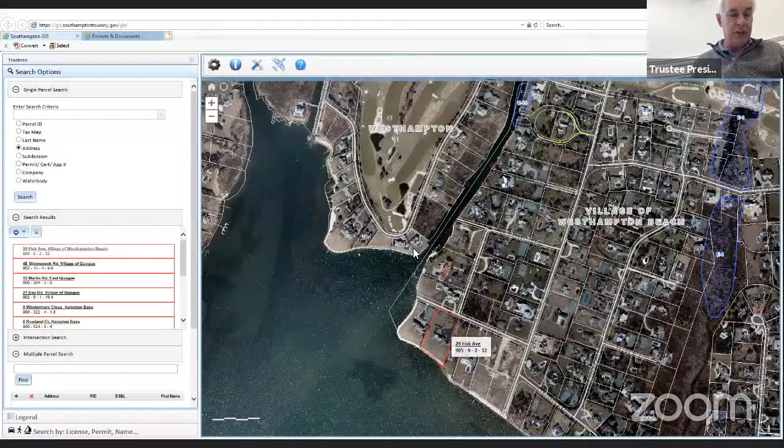All right, so we move on to general permit applications for determination. First one on the agenda is John Keough, 29 Fisk Avenue, Village of Westhampton Beach. And it is for a dock that is 125 feet in length. This has been discussed before a little bit.

If you want to bring up the bathymetric detail on that. Okay, is the applicant's consultant here? Yes. Okay, want to let them in? Okay.

Afternoon, everyone. Hello, Lisa. Lisa Poyer with Inter-Science on behalf of the applicant. Okay, so at...

At 125 feet, they reach a depth of 1.9 to 2 feet of water at 125 feet. At this point in Moriches Bay, the pier line is 100 foot. Okay, so a permit, the only other permit in the area, was issued...

to an entity called Onek Tove, which is at the end of Onek Lane. That was in 2003. It's an 84-foot long catwalk, and that reached 2.4 feet of water.

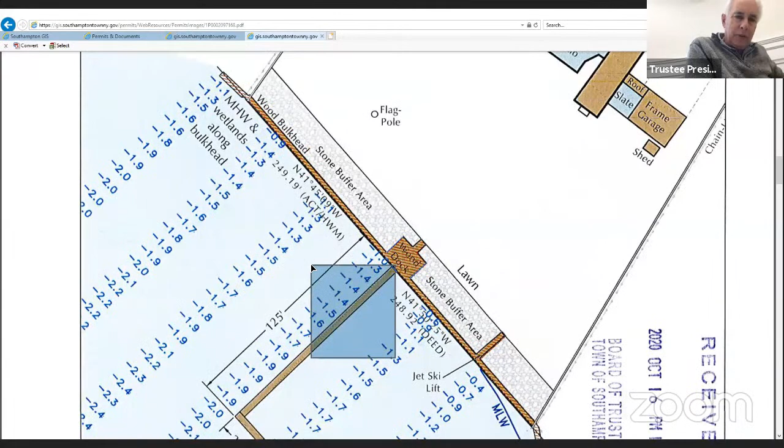I'd be hesitant to allow for anything longer than what exists at the property to the west. But that was originally a large house, and we allowed that dock. Now the house has been demolished and it's been split up into 4 different lots.

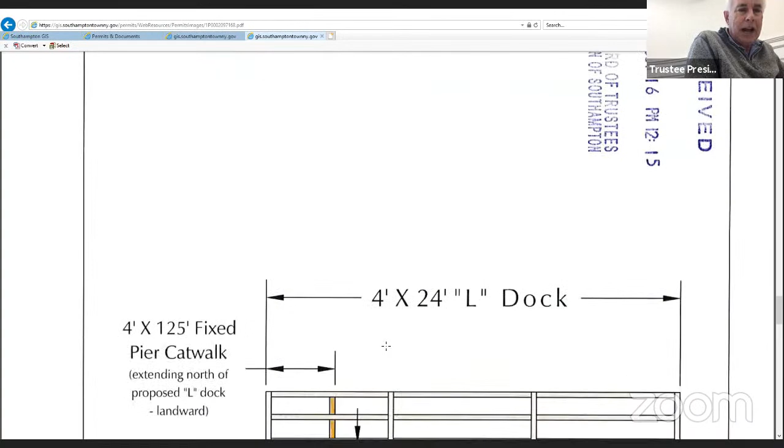So I anticipate another dock probably coming in between that and the easterly dock. So we have to account for that. It's roughly the same dimensions of water. I'd like to try to keep it in that line at least.

So my main question is, could we propose a boat lift for the owners interested in doing 2 jet skis on the property? They have the jet ski type lifts that lift the ski entirely out of the water, and they're fixed only to the dock. Is that something we could propose and you would entertain?

Oh, to fix that to the dock instead of the bulkhead? I wouldn't have a problem with that because we do allow for boat lifts in Moriches Bay.

Okay, so let me come back with the revised plan. I may try and shift it. Well, let's get the opinions of the rest of the board. How is everybody on that?

That's fine. I didn't realize it was going to be used for jet skis because I was just concerned about the depth of the water if there was a boat lift. But if it's for jet skis, that's fine.

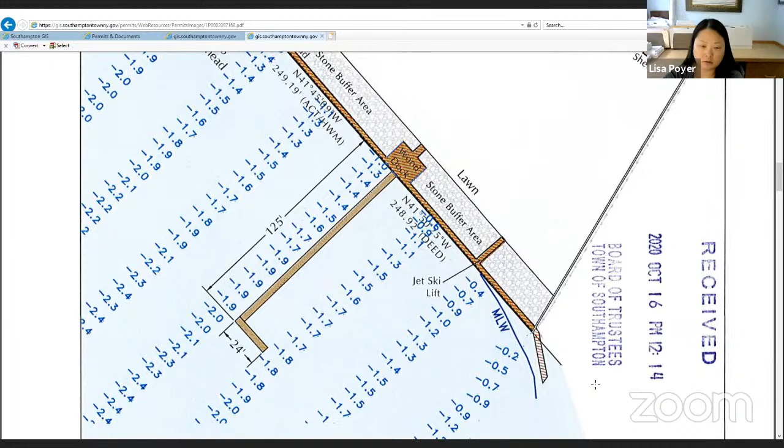Okay, what kind of lift are you gonna have? Are you gonna swing it onto the dock or will it be just hanging in midair? I think we're trying to look at, I don't know if I can share my screen. Well, those elevator docks, those angled ones that just kind of drop into the water. Right, because we don't want to put an eyesore out there for the neighbors either.

Okay, so let me put together a revised set of materials and resubmit it back to the board. Do you want to share your screen? I was trying, Lisa. Because I think, Charles, oh, there it goes.

Because you have a picture of the jet ski float, the lift. This is an example I just found online, but it's this style. Yes, that one.

And then there's, they would take much less of a beating out there. Actually, you could bring them in a little bit closer also. But it goes into the water just enough to lower the jet ski down, but it doesn't physically touch the bottom, but it does allow 2 jet skis to be used. Raised and lowered, and it is affixed to the dock.

Here's the question. How much water does it need? I don't know, I'd have to find out what the jet skis draw.

The question I have is that if it's only going to be used for jet skis, does he really even need 80 something feet? Why would we put something out 80 feet for 2 little jet skis? Well, let me see what the water depth is necessary for the jet skis.

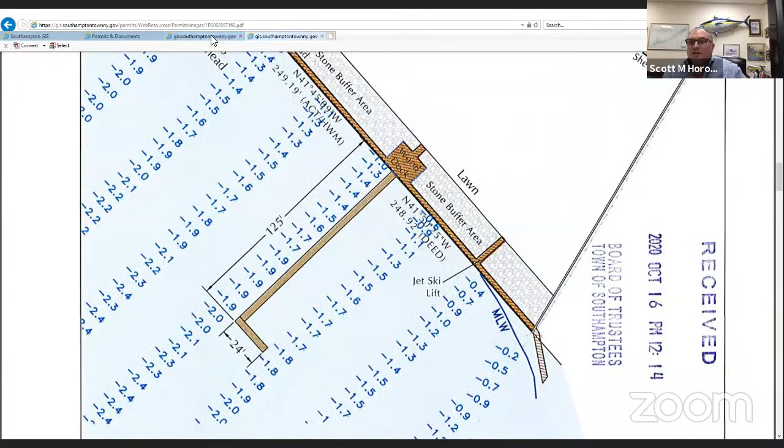We've got a proposed in-place and in-kind replacement of 302 linear feet of bulkheading, including a 20 linear foot return at the south property line. Also proposed is an in-place and in-kind replacement of a 4x55 low profile fixed pier catwalk, and replacement of the existing wood walk landward of the existing bulkhead, with all decking through-flow or equivalent. All construction is to be completed using untreated materials.

Mr. Walker? Gotta unmute. Is he there? Yeah, he's here. Okay, unmute. Go ahead, Jim. Okay, you ready? Yes, sir. How are you? Nice to see you.

Scott, I sent this project in a schematic manner, and I was hoping to get some input in terms of construction, because typically the state and the town would be interested in how the thing's going to be built. I sent it into the DEC and got a review right away, and they told me to submit a whole bunch more stuff. So essentially the Board of Trustees is kind of ahead of the DEC, and I don't want to give the impression that I know exactly what we're going to do there.

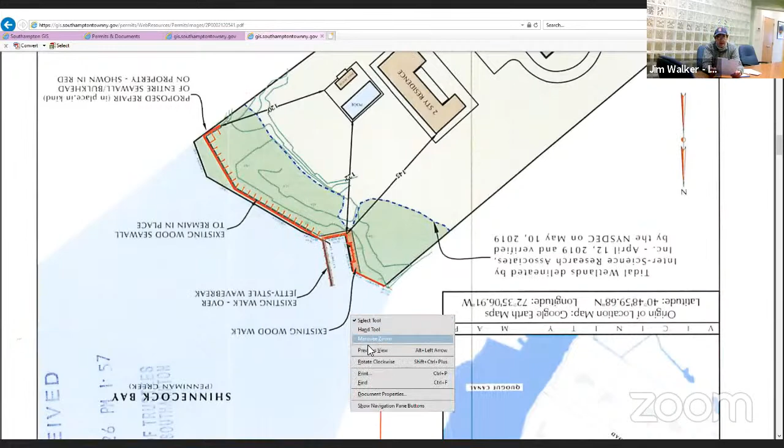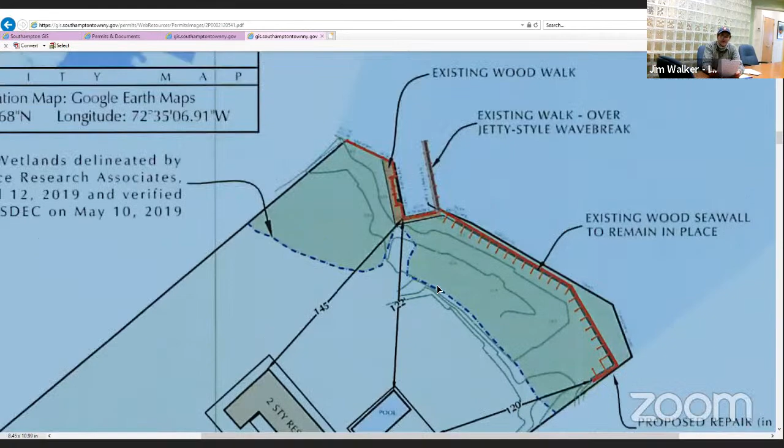What it amounts to is we have an existing seawall with a return. This is the area going south from the little boat slip. We have a bulkhead on the north side going to the adjoining property line. Then we have a little boat slip that needs to be maintenance dredged. And we have an existing structure the state is calling a walk over a jetty-style wave break. To tell you the truth, that's a dock, so I'm not certain how this thing is going to be permitted in the end.

I want to ask the trustees to consider a couple things. Going south, it's a seawall, and the seawall behind it has wetlands. These wetlands were originally mapped by JMO Consulting, which you guys are familiar with, and Glenn flagged wetlands there. The wetlands line has been confirmed since by the state for a new house that's being built there.

When we build a new seawall, we can build it in place and remove the old seawall. There aren't any facing piles on that seawall. Typically I'd expect the state to tell me whether they'd like to see screw-in piles or some other tieback system there. But since I don't have anything from the state, I'm going to guess we should have screw-in helical piles there, like we've done in other instances where there were wetlands behind the seawall. So I would intend to ask the town, is that something you think you'd like to see?

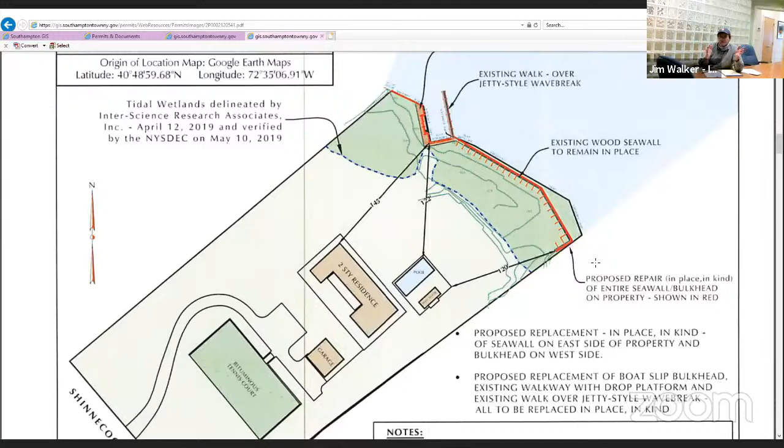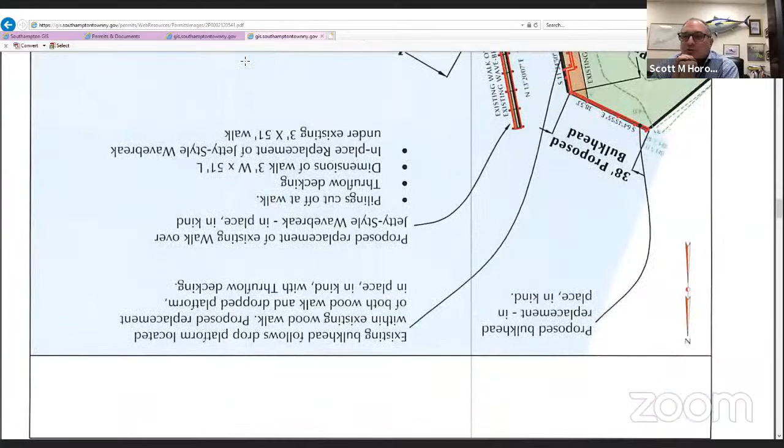And Scott, the town can intercede at any point and give me your thoughts. Well, my thoughts are the least amount of disruption to the wetland and 100% compliance to Blue Book regulation is obviously what we're looking for. So if we could achieve that and check all the boxes to all the regulatory authorities, I think that's what we're aiming to do.

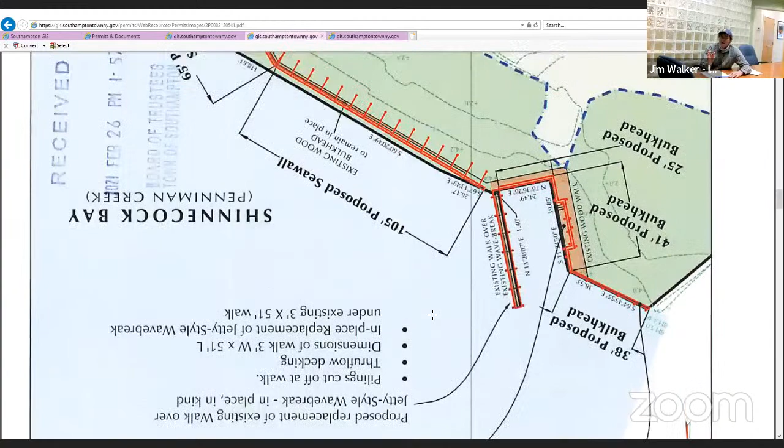Okay, so Scott, in that regard, the easiest way to rebuild the seawall and the bulkhead is to install helical piles. Then we don't have to worry about a driven pile system and we don't tear up the whole thing. So the town is expecting helical piles? What's the dimension on those — the diameter? I don't know, Eric, but I'll get you that information and give it to you for the next meeting.

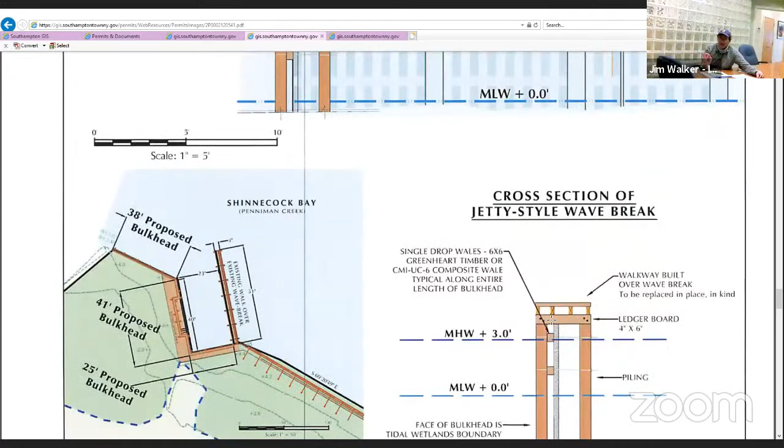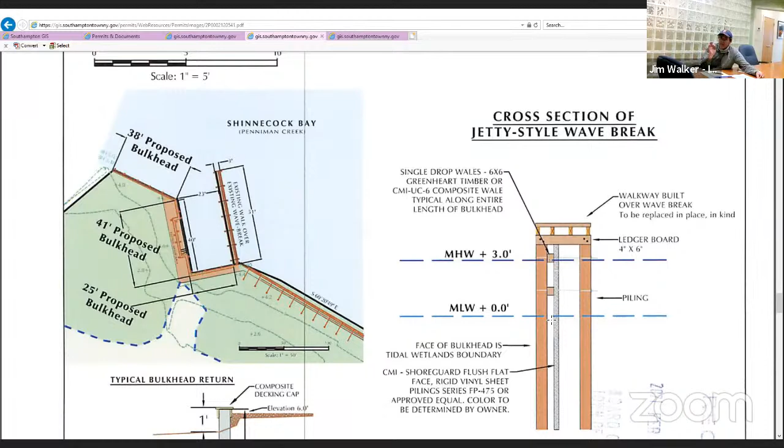I'm not looking for a permit today. I'm really hoping to get feedback from the state, which I didn't get, so I'm asking the town for feedback. Scott's saying tear up the property the least amount possible — the least amount possible is to put helical piles into the grade. As long as you're certifying the structural integrity and checking all those boxes, I'm not opposed to that, if that's what you believe the state's going to want to see from you. I don't know what the other board members feel, but I'd like to see the least disruption.

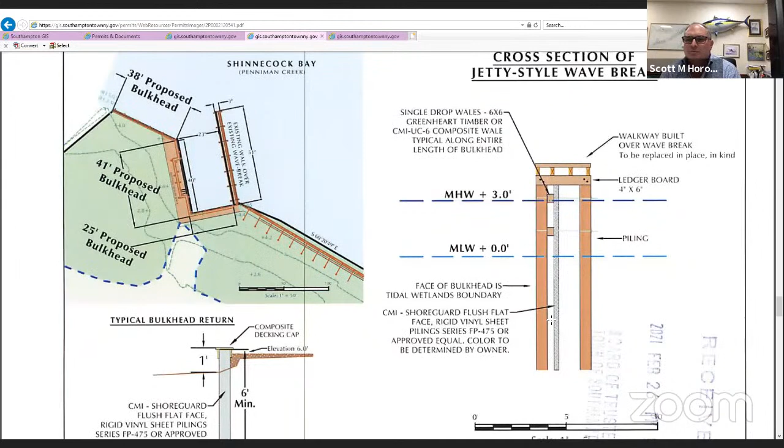You don't want anything that's not going to work, and then a first big surge comes along, and we end up cleaning it up all over the bay. So Eric, if we have to, we'll get an engineer to provide construction drawings.

I'm not really concerned about that. I was really concerned about the basics here. I have wetlands behind a bulkhead. The bulkhead is pretty high, about 4.5 feet, and then the grade drops down and connects to a low area along the north property line. So we have real wetlands issues here. Matt Pensky did the review at the DEC and didn't come up with anything except to provide more precise plans, so we gave him precise plans.

Notwithstanding that, we can come back with helical piles and propose that.

We also have wood walks around the boat slip, and the first one goes out into the water. Typically we do not propose to rebuild docks at 3-foot width, it's too narrow and people load up to get in a boat and walk out on it. Typically we show 4 feet, but I got a bunch of noise from the DEC about that. So right now the little walkway over the water, over the timber jetty, is 3 foot wide, and we can leave that alone for now, that's fine.

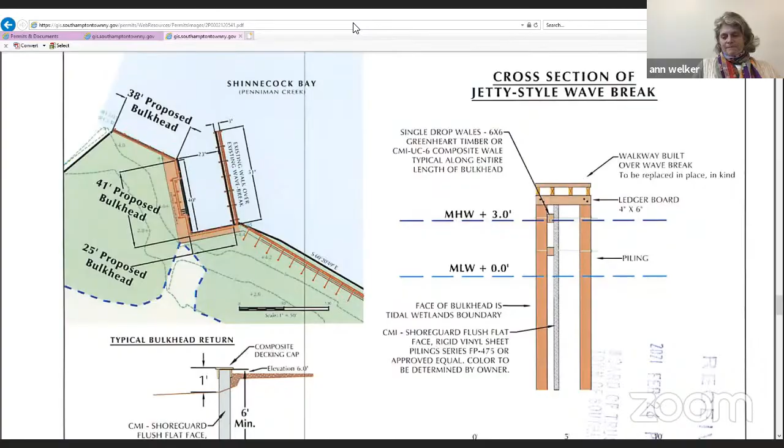Well, we have a return along the property line. We're replacing a return that's already there. I don't think we want to change the whole shoreline at this particular piece of property. I think it would be a terrible invitation for flooding all the way to the street.

Part of the proposal that we have into the state is to remove the Phragmites and plant native species in that low area. So we're proposing to upgrade the natural attributes of the property in any case.

And I would not really be comfortable changing the bulkheads or the seawalls out very much. The guy has a little boat slip. It's kind of nice. He's not going to be able to keep a very big boat there because the water's shallow.

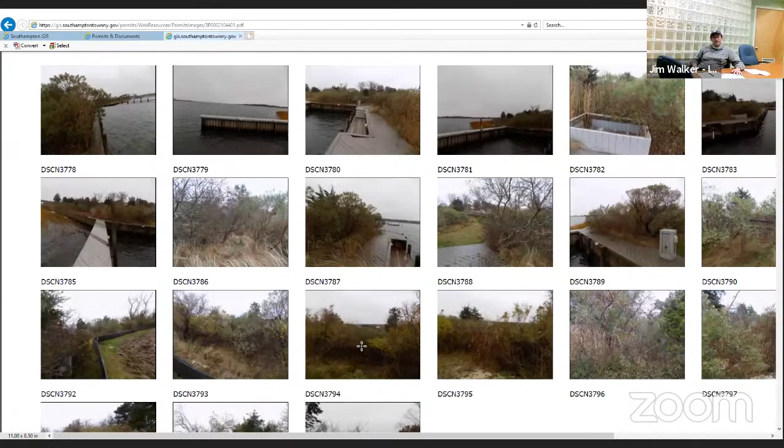The return is at the south property line, and if you walk down in the wetlands along the existing seawall, the seawall turns to the right, and we're proposing the same length of return as currently exists. Behind it is Spartina patens and groundsel bush. It's a cute little wetlands area. It's kind of weird because the property drops down from the bulkhead going to the north.

Well, let's see the picture that you submitted of that return. Which picture is it on there? I have no idea if I submitted a picture of a return or not. If you want, I will go get one.

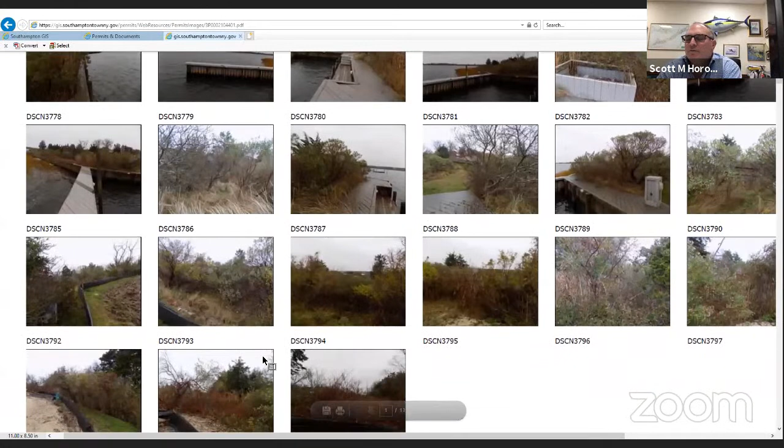We're not advancing this today, so you could provide more documentation if you want. Well, I think you have to show the pictures of all of the existing condition. There's about 15 pictures there, and nothing shows the adjoining property and the return. Right, so he's got to get us some more information because obviously it's the start of the conversation.

So, okay, we can get that, Jim, right? Yeah, I'll gladly provide you a photograph of the return. To tell you the truth, I probably didn't take a picture of it because it wasn't very exciting. All right, well, I will, and I'll provide it to the board. I'm probably going to come back to the board with helical piles. If the property needs to be engineered, we'll send it to Steve Maresca or somebody and get the engineering done.

I'm really trying to piece together what's needed for this property. There are intact wetlands forward of the bulkhead as well. Those are intertidal marsh. The wetlands behind the bulkhead are high marsh wetlands, and it also includes a whole bunch of Phragmites that we're proposing to replace with native wetlands, shrubs, grasses, and related plant materials.

When do you think you'll be ready? Next work session, do you need a month, two months? How much time do you think you need? If you give me a month, I'll perform.

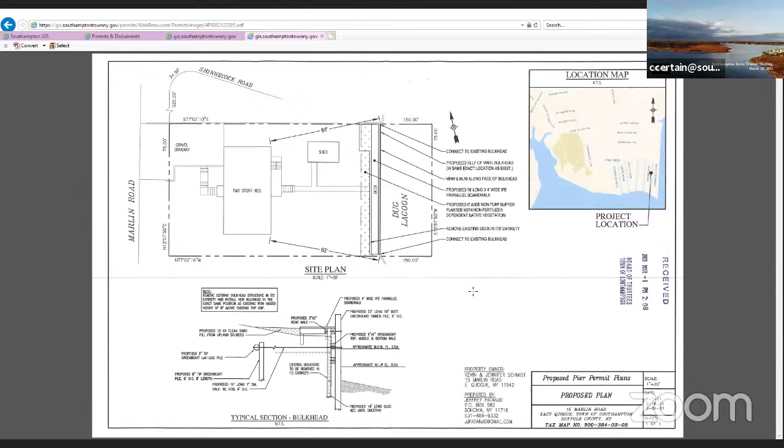All right, James, put some pictures up, show the board. Yes, sir. Hold on.

Typical waterfront in that community, Scott. Yeah, it is typical, and the adjoining properties are slightly elevated. So if you look in the pictures, you're going to see that he's going to be just matching the people next door to him. He's basically now put everything on the application, replacing pretty much what's there, and installing a buffer rather than the lawn right to the bulkhead. So we're getting the walk and buffer out of it as well. So it's meets Blue Book to my knowledge. James, you concur? Yeah, he changed everything that we asked for last work session. So this one's okay to move.

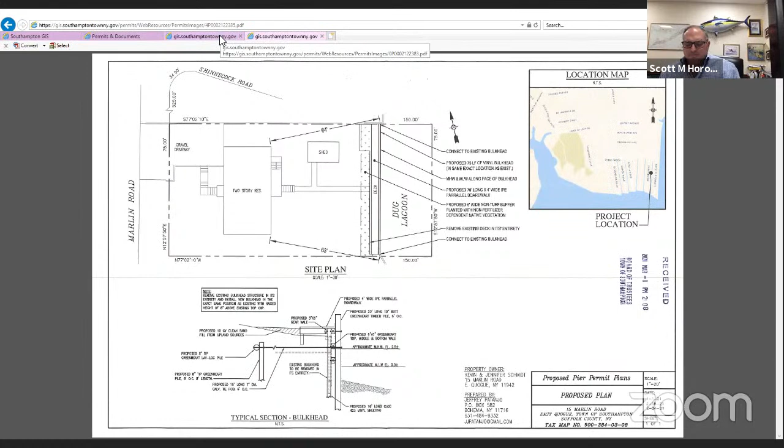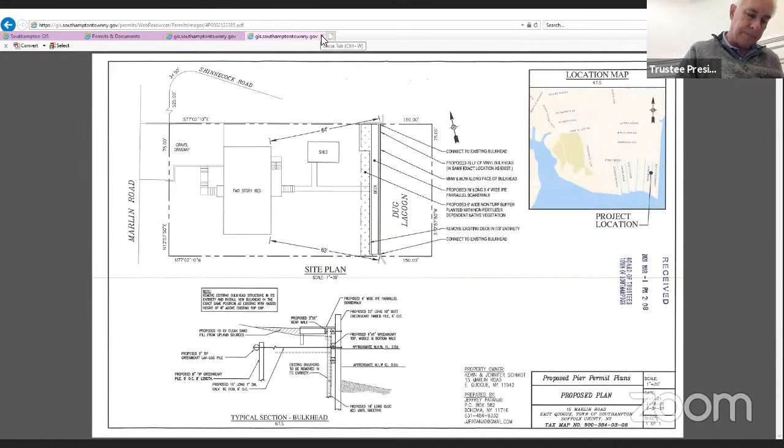If the board's pleased with that. I'm good with it, Scott. Good. Eric? Oh, yes, yes, Billy. Thank you for a second. Trustee Pell, I'm fine, I was on mute. Ann, yes, got your buffer. All right, let's advance it. Move to land use ecological.

The agent for the applicant, Audrey Weinberg, at 27A Bay Road in the village of Quogue.

This is a modification. I don't know if James, if you have the modification, or if you have the original permit so the board has that information. Or the original application, I should say. This is the original permit. Okay.

So what they're asking for is an extension to the catwalk to go out farther, because I guess they made a mistake on the depth of water, and when they went to install the floating dock, they didn't have enough water, so they're asking to go out farther. How much? Looking for 16 feet, 2 eight-foot sections, okay.

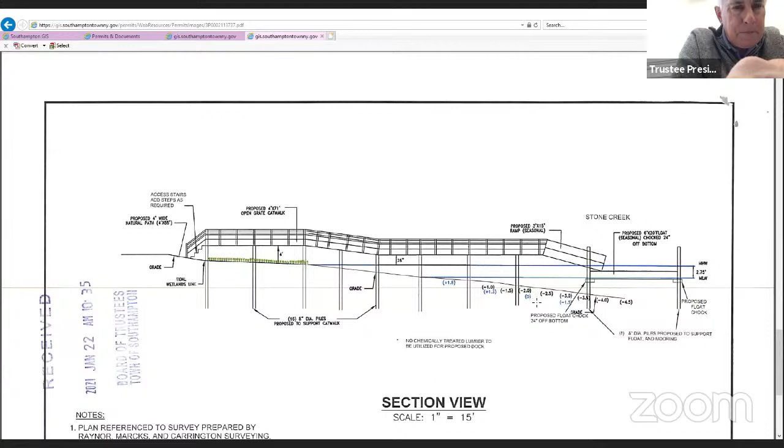How far off the entrance to Stone Creek? What's the total width, 200 and some odd feet? Yeah, it's plenty wide enough. Plenty wide, it's gonna meet all those tests. Bring the aerial up again, James.

Is this the site with the new house being constructed? Correct. If you guys can hear me. Oh, there you are. Hi. How you doing, Chuck? Good. How are you today? We're good.

Just to clear it up, actually the survey that we got with the depth soundings, I think Scott knows it drops off there, but it never showed the right place of the drop off. So that's why when Ron Barnish built what was approved, 55 feet of catwalk, the float would have been sitting in 1.5 feet of water. So that's why we needed the 16 feet extra. And it is plenty wide there, it's not a problem. And yes, that is the new house, Eric.

Yes, okay, I was just down there the other day. I mean, as long as it's all meeting Blue Book, I don't have any objection.

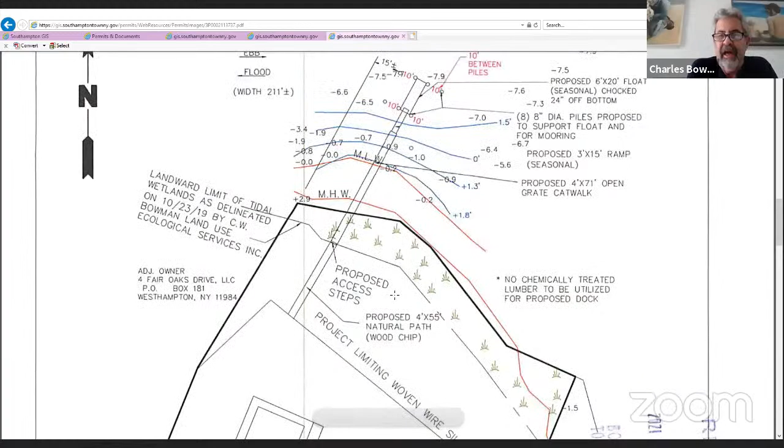What is the total length of the dock? It's 71 now, it was 55 for the fixed dock. The ramp and float are the same. We just extended the fixed docks 16 feet.

So the overall structure, from high water seaward, is less than 100 feet, right? That's the pier line. Correct. Yep, absolutely. Then I'm fine with it. You're right out to minus 7.9 feet.

Well, it drops off really, you can see where the 6 foot is right under it, drops off. It goes from 1.5 here to 6 feet.

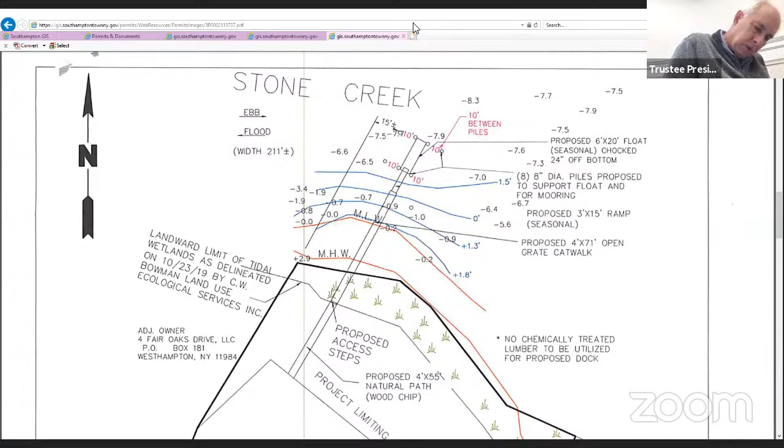There's not a lot of houses there, this is not going to be too crowded. You got enough width, it looks fine. Sounds good, you could advance that. That concludes my permits for today.

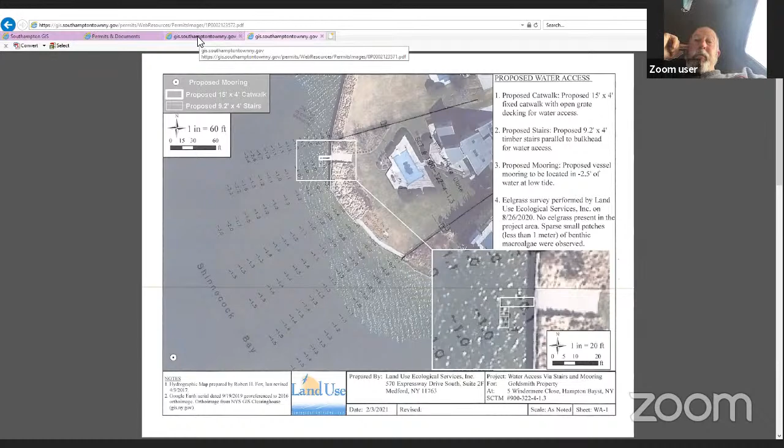So if we're good with it, can we advance it? Or does anybody have questions? I'm fine with it, Ed. Sounds good, let's advance it then. Okay, thank you.

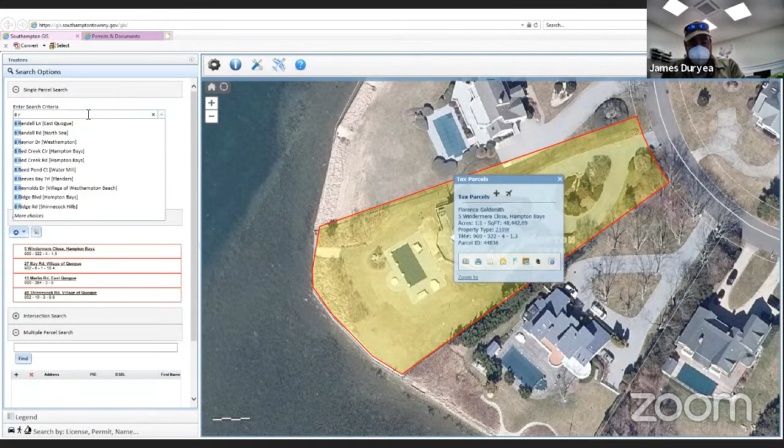8 Randall. Come here.

This property is between Shinnecock Road and Bay Avenue East, on Randall Lane. We had given a dock for this property. The applicant and consultant basically let it lapse because they were in conversations with the Army Corps to get a permit from them, and they were held up for a long time.

So basically it's a 4 by 135 foot catwalk supported by 8-inch diameter pilings, with a 4 by 5 step up and over the catwalk for pedestrian pass and repass, a ladder at the end of the dock, all open grate, all wood to be untreated. We did approve this back in, I believe, 2018 or 2019, but they never put it in. So they're coming back to reapply for the same structure we had approved previously.

It is inshore the eelgrass beds. There are eelgrass beds up and down that whole entire coastline. The dock at 135 feet is situated just inside of the eelgrass beds. James, you can actually see the eelgrass beds in the area, they're offshore about 300 to 500 feet, and they go seaward along that beach.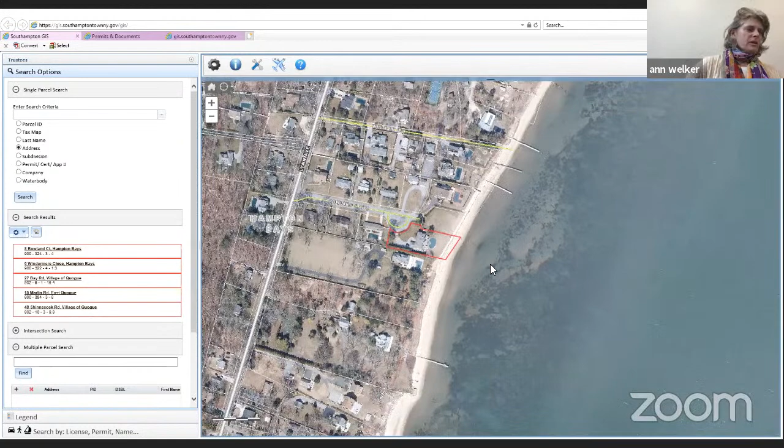And there's no pier line along here, right? There's a 135-foot pier line. The dock just to the north of it, I believe it's Joe Scro's property, that was a similar dock that we approved, and this dock would be the same length and same area as far as depth of water and inside the eelgrass beds.

It's the pier line from mean high water, not from where they are. So it's a 135 foot catwalk, but that's landward from mean high water, so if you reduce it down, it meets the Blue Book regulations.

Got it. And it's through flow decking, like a couple of the docks along there. We asked to have the through flow decking, a light penetrating decking, and they're the only docks through Sandy and Irene that did not pull up and break apart. So I think it's a good project.

James, does it meet the Blue Book regulations that we need? Yeah, and you guys had approved it in the past, so I don't see a problem with it. Well, if everybody's okay, I'd like to move it forward. I'm fine with it, Ed. All right, advance that.

There is some scouring that's occurring on the Smith Creek side. So we feel that with the raising of the bulkhead and backfilling it, and then planting those areas on that side with supplemental beach grass, it will alleviate that situation.

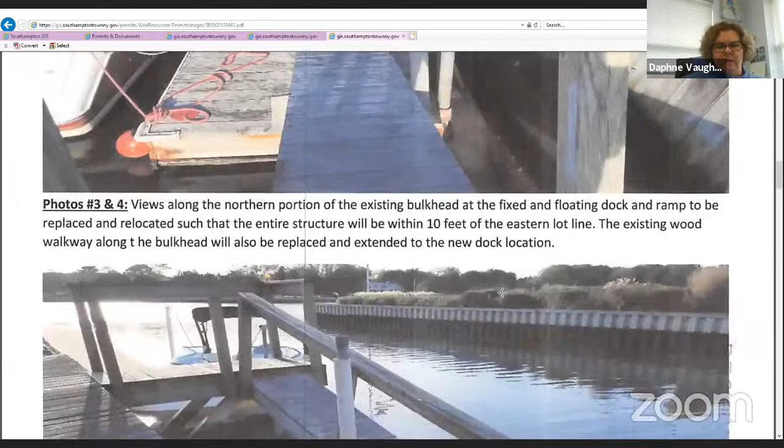The canal side, in the photos here, you can see - this is the area that we're proposing to dredge to -3 feet above sea level because of all of that sedimentation that's occurring. So we would like to take that out so it opens up his usable area, and also keeps his boats out of the canal, not impairing the navigability of that entry into the canal.

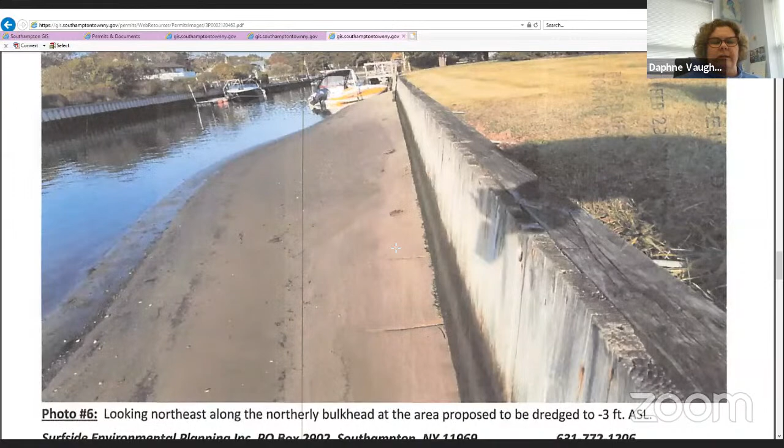The existing dock that's there, we would like to replace in place. Basically, we're going to shift it down - I think it's about 10 feet that we're shifting it so that it is at a 10-foot setback from the neighboring property to the east.

Which will require a slight extension of the wood walkway that is landward of the bulkhead. You can kind of see there's a little white line there where the existing walkway ends. So we're basically adding 10 feet to it to accommodate the relocation of the dock.

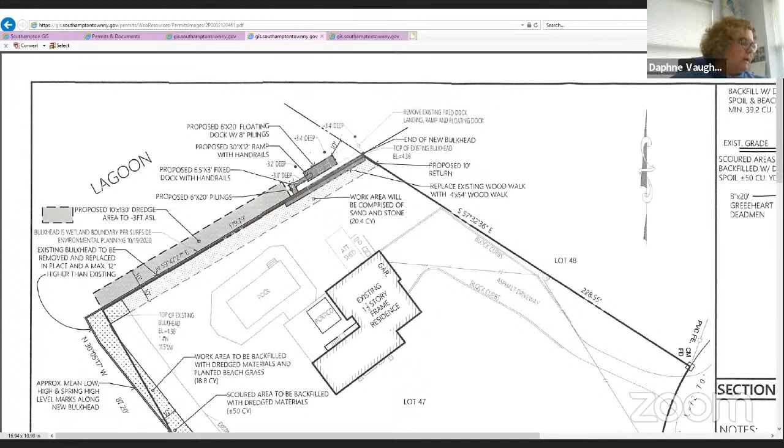And the material that's going to be dredged is going to be put behind the bulkhead? Yeah, the majority of it would be utilized back into the property. If there is extra, it will be carted off site to an upland source, probably to a landfill.

So it would be a vinyl bulkhead. We're proposing the plantings on the creek side. My client would like to keep the area on the canal side more open without plantings if possible, to do either sand or stone or a combination of the two, if the board's amenable to that, just to allow him continued access without vegetation, because that would be the usable portion for his boats.

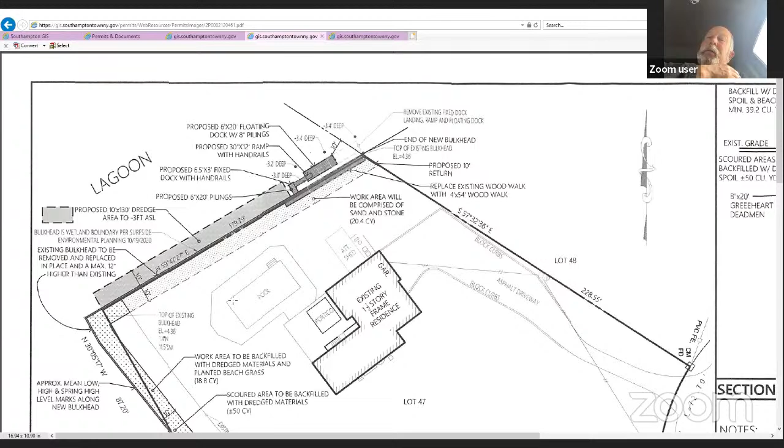How about some vegetation on the southerly end of the project in the lagoon, where it's far away from the dock? It looks like - he's got almost 180 feet of bulkheaded waterfront there. Can he put a small area on the south end of the bulkhead project to vegetate it with some grasses? You see where the shading changes.

There's the existing vegetation line. So the polka dot area, the wider dots let's call it, are where there's existing vegetation that he would maintain and/or supplement as needed. So that whole corner is already, or would be, supplementally vegetated. Okay.

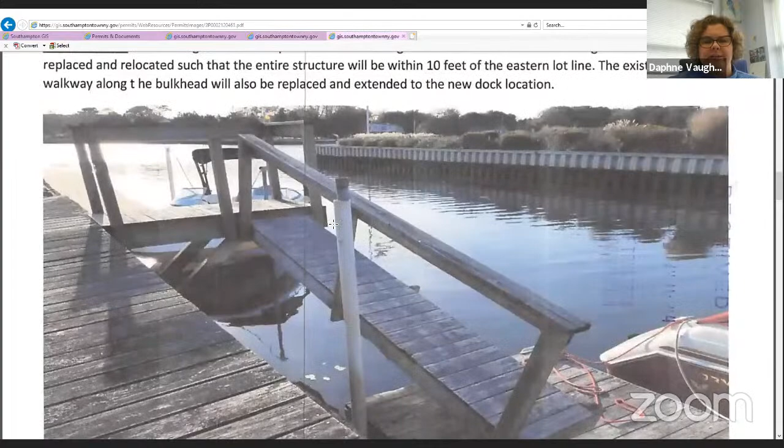Yeah, and it's good to have some vegetation there, especially beach grasses. It does - if you get a high tide and a storm, it will cut down on the wave energy and damage to his property up in the lagoon further. Yeah, the photos, if you can find the photos that show that existing vegetation, it is very dense. So it's well established.

Down on the Smith's Creek side, I was down there, it's very well established. Hey Ed - yes, that should go farther around the corner, because that way when you get a storm there, he's not going to keep a boat at the corner anyway. It should go probably 20 feet, 30 feet down from the corner.

Well, that's what we just asked her. How far does - I'm trying to, I think it looks like 10 feet.

Probably more than 10. Let me see if I can scale it quickly. Where's the scale? 1 to 40. Yeah, Billy's right. He's not gonna be able to keep a boat there because it's too rough of an area, and it speeds up pretty quick there. It's about 25 feet right now.

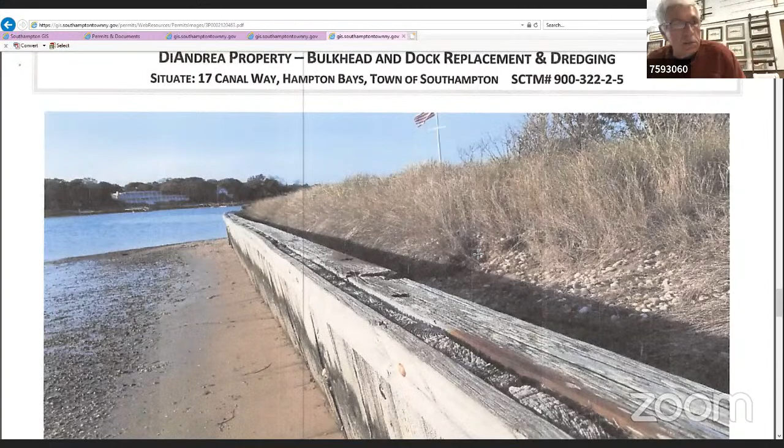Well, you hear that, Bill? Okay, so we should put a plan in the permit that it has to be at least 25 or 30 feet so future owners can't cut it back. It's important they maintain it because it will protect his property during a high tide surge. There's no issue with maintaining the existing vegetation, he just doesn't really want to expand it if he doesn't have to.

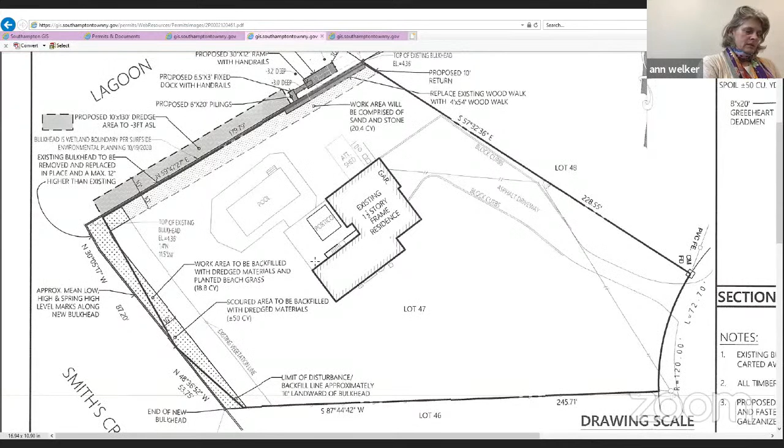I would be a proponent of expanding it because that's 180 feet of bulkhead on the inside of the creek, and 20 or 25 feet of that is barely 10%. If we could get upwards of 20 or 30% by extending that vegetation a bit to the north, it would not make a considerable dent in his grass that comes right up to the bulkhead, but it would make a considerable difference in the amount of runoff going into the creek, which is already an impaired water body. Anything that could reduce the runoff would be very helpful.

Well, it's a bulkheaded property. That whole place is bulkheaded, right? Yeah. So Daphne, did you have a conversation with the property owner about this? What we're talking about is pushing the buffer northerly, maybe 40 more feet. Or is this something you haven't discussed?

40 more feet? Yeah, because if you double what is there—you said it's 25—if you double it, it'll be 50. And it's only a very small portion of that property, less than a third. And he's got an extensive buffer on the Smiths Creek side of this property, right? Yes, he does. He has a very nice buffer.

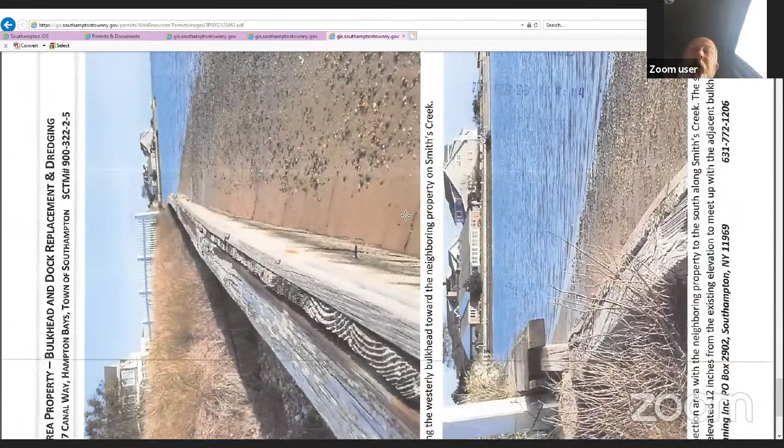Yeah, that should—it's just grass, and you can see where the bulkhead is starting to fail. Photo number 2 kind of shows just landward of that vegetation. So right there, that's the canal? And then we're looking west. Yep, we're looking west, right? Yes, yes, we're looking west.

Okay, hey Scott, you know where that is—that's right where you grew up. Exactly, I know exactly where this is.

I don't think we're asking—I don't think it's going to take away any of the usage of the property. He's got a nice dock there, and he's going to have 125 feet of waterfront that he can access with a boat. So I think by us just asking for this, it's not a big ask, really.

Bill hit the nail right on the head—that's exactly where I grew up. Okay, and you do get, if you went over there, Irene, Sandy, with heavy storm surge—

It does get overwashed there pretty good. You see the guy across the street, across the creek? Yes, I know that house very well, and that saves his house when there's a big storm. Right, and it cuts the house down too. Yeah, that's what I'm kind of envisioning for the next section.

25 feet would be doing himself a favor if he could incorporate some more deep-rooted native vegetation up along the front on that corner—it would help him out, and it would help the environment. He does have a nice buffer across the Smiths Creek side, but if he can incorporate a little something more in there, it would work to his advantage when you do get a big storm. He still wants to use the bulkhead for boats and whatnot.

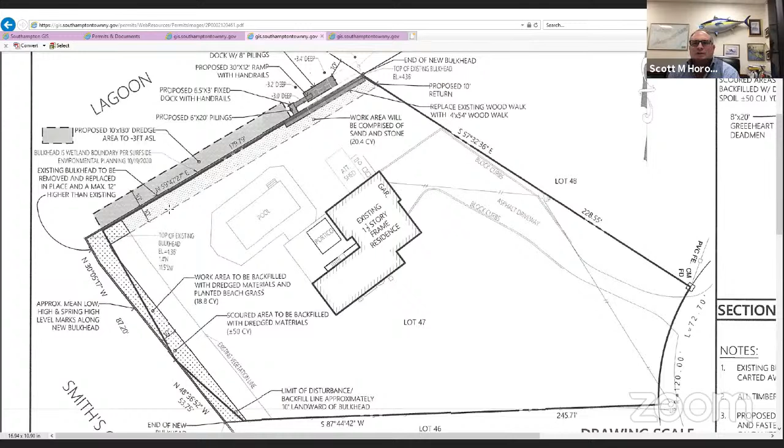So I don't think the board wants to get overburdening or overkill you. I think we just want to try and get something that's going to make sense for everybody, work for everybody here. So it probably warrants a good discussion.

Yep, okay, that's understood. Certainly. And like Bill said, I'm familiar with the area real well, and I'd be more than happy to help you out as well, Daphne, if you need help having a conversation.

Okay, alright, alright. Thank you, Daphne. Thanks, Daphne. So we're gonna put that on hold. Yes, please put it on hold. I'll get in touch with James when I have an answer. Sounds good. Okay, thank you. Appreciate it. Thank you, Daph.

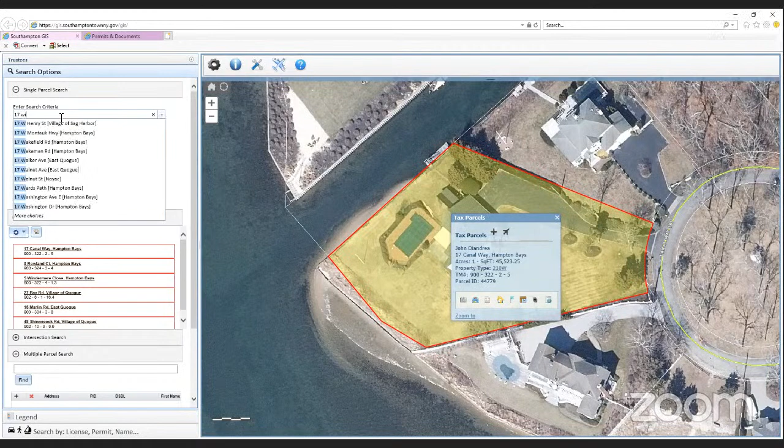What? Come here. Is Gina Rigdon on this? DKR Shores? Yeah.

Ed, can you see that? Yes, I've got to shrink it down a little bit. Yes, I was down on the property the other day.

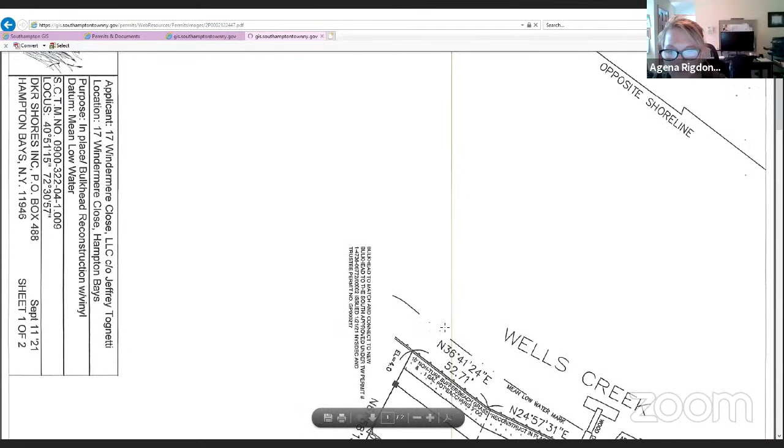Gina? Hi, I'm here, can you hear me? Yes. Hi, so this is 17 Windermere Close in Hampton Bays. It's a 177-foot frontage, proposing a 20-foot return on the northern side. The southern side would hook into a new bulkhead actually under construction at 15 Windermere.

Yep, it is same height as existing, matching the existing height of the new bulkhead to the south. Recently, in due diligence, I emailed James a revised set of plans and a revised cover where the concrete pad is. I included the verbiage of removing the broken concrete pad.

And then in the area right where the dock is, proposing a very small and modest 4 by 20 untreated boardwalk in the same area, just to get on and off the dock safely. Yep, you know, load coolers, that kind of thing.

Also note that we added not just a beach grass buffer, but switchgrass as well, 3 foot on center. What's the benefit of that, Gina? Adding the switchgrass? There's some because of the overspray, there's a little bit of Phragmites and stuff on the land, and so we try to limit the fill and make it as environmentally friendly as possible.

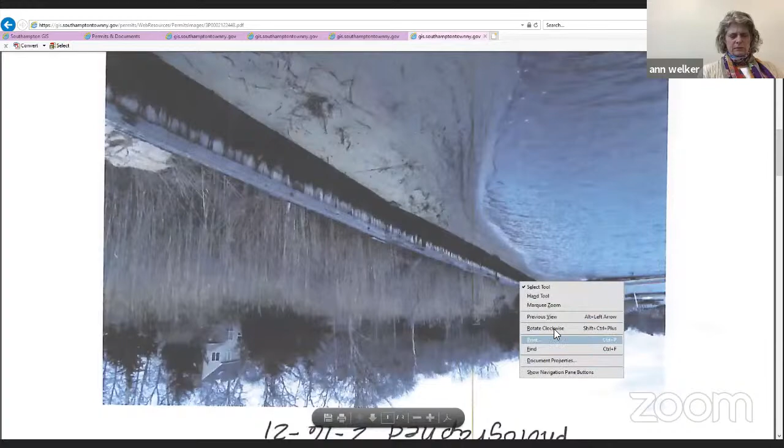There's a nice gradual grade there, so there's plenty of room for it to be absorbed after any storm events. Is this a new house? There's a planned new house that I have a building permit for that has not started construction yet, and it will be FEMA code compliant with raised pilings. So raising the bulkhead is simply unnecessary.

There's an extensive marsh system with a lot of Phragmites there. Of course they're not native and invasive, but there may be something hidden in there, and I'd like to restore it properly.

Okay James, is this all compliant with what we need as far as our Blue Book goes? Yes, and I received her updated plans and cover sheet yesterday. Unfortunately we did not get it uploaded here, so it doesn't reflect the new one, but we did receive it and it looks good.

Do we need to discuss anything on the new plans we received, or have we covered everything? No, like she said, she added a 4x20 foot untreated wood walkway deck where the concrete slab used to be. It's really only about a third of that width, not even as big as that concrete slab was, if you scale it out.

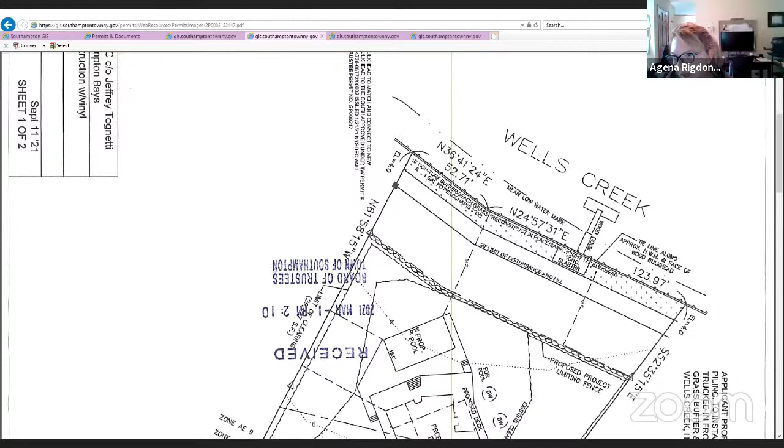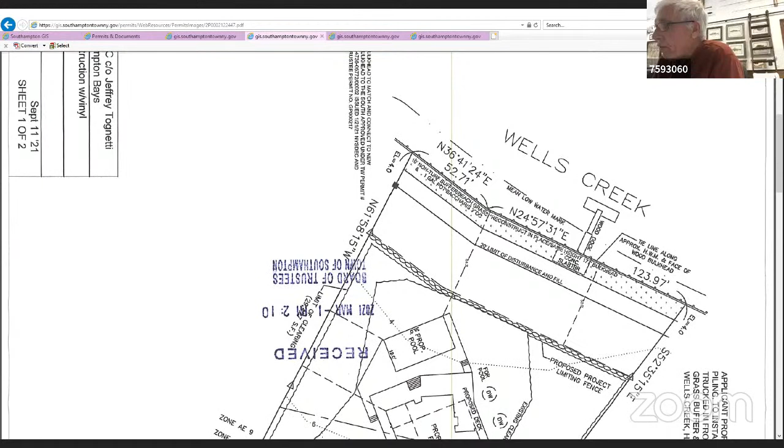It's something consistent with what you guys have asked for in the past. And the 10-foot buffer along with switchgrass and beach grass is a great buffer. So I'd recommend it. If no one has any concerns or more questions, can we move it along then? I'm fine with it. All right, thank you, Gina.

Thank you, Jim. I guess I'll stay on for the next one. Okay, so now we have a new one, Billy, you're up.

Go ahead, Gina. Okay, so now we have Christopher Prochner. This is located at 26 Landsend Lane, which Billy, you're very familiar with. We're all very familiar with it. It's a dock on the man-made dug canal side of the property, on the northern side of Landsend Lane, which is the vacant parcel, but it's combined with this.

I don't know the particulars of how this right of way got through here. It's very complicated, but they sort of own part of the road and land across the street, which is typical for that particular road. So basically we're asking to reconstruct the bulkhead and raise it to match Eric Storch's, which is to the west, on the left side looking at the dug canal, to match that height and mimic exactly what was approved under that permit. And then a small untreated walk and walkway to get there.

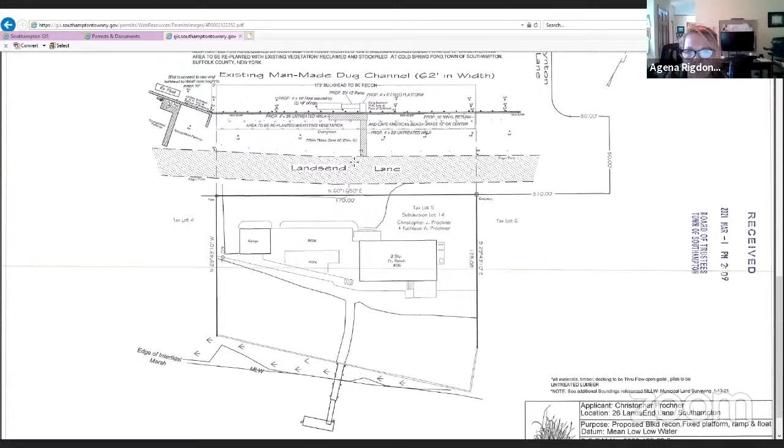As I am in all of those areas, I love the scrub pine, I love that look. And I think mixing up the vegetation over there adds a lot of character. It absorbs a lot of water in case we have some tidal overflow over the bulkhead, which is normally unlikely in the man-made section on that side, but it could happen.

And the bulkhead is not in good shape. There's a lot of sinkholes behind it, and it does need to be replaced. It's that old CCA, it's been there since the 50s, whenever this man-made dug canal was created. Little by little, one by one, we're replacing each one.

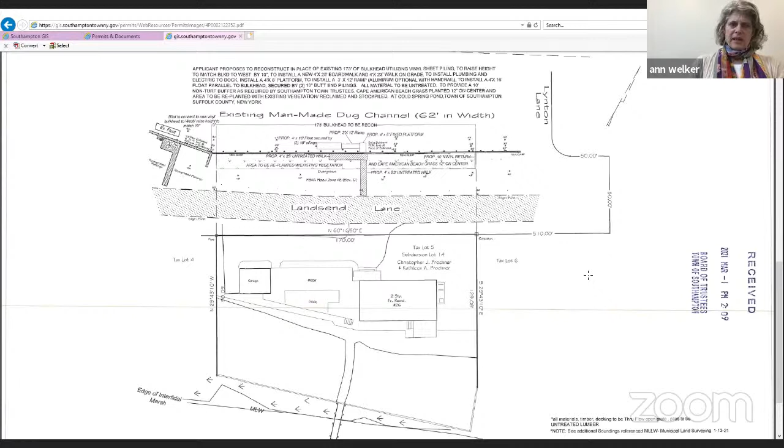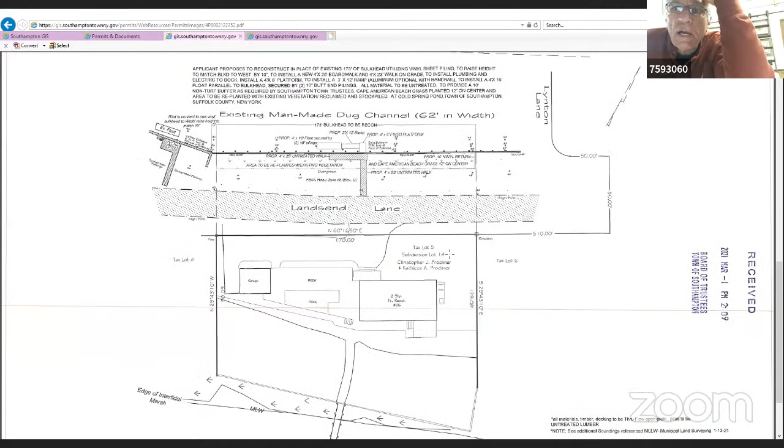Sean, this may be a question for you, but Gina, is this property held singly and separately from the property across the street? It's actually all on one property — the deed description references the vacant parcel across the street as part of this parcel. Then we have a problem, because you're only allowed to have one dock per property, and now you have a dock on the bay side and you want a dock on the canal side. So you have to get rid of one dock, unless the board thinks otherwise.

Well, I did talk to the owner about it, and his boating — that's actually on Cold Spring — he's very conscious of all the oyster farming and oyster cultivating on the Cold Spring side. His craft is right in front of him with all this stuff, so he doesn't really use that dock. That's why he wants the other one, because he doesn't want to interfere with the oyster cultivation. So it's much safer and less disturbance to use the canal side for the boats — less wave action for his boat there too, in case of a storm.

But is he going to just remove that dock and still have access to the water? What I had said to him is, what about a jet ski? What if you leave the side where we just got permits, on Cold Spring, for just jet skis, and then the other side, the man-made canal side, for his boat.

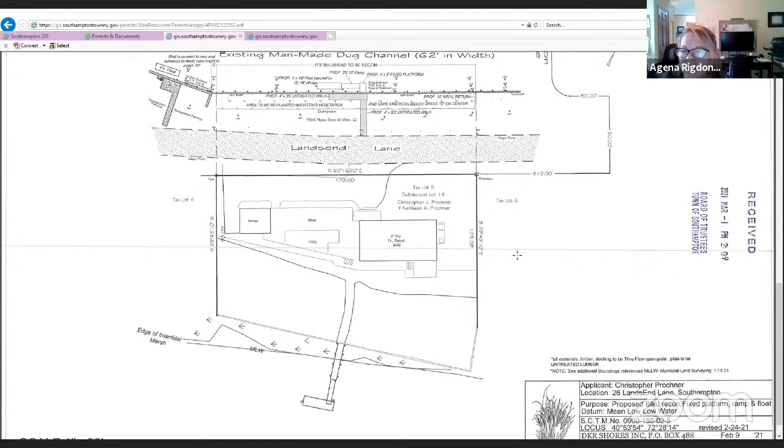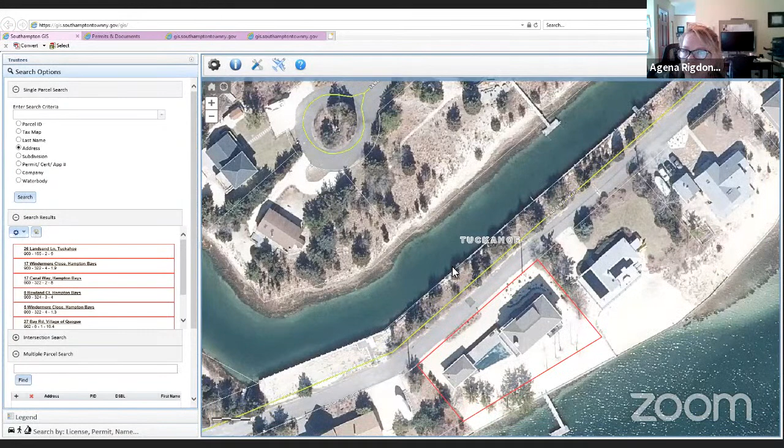Hey James, can you go back to the overhead shot of that canal? So the only other dock on that canal is way up there. Well, no, Eric has one to the west — it just doesn't happen to be right across from him. It's not right across the way from him. There's no docks on the other side, no.

So it's really up to the board, it's the board's call. I mean, I can certainly talk to him — I told him this might come up. And you were right.

What does the language read in the blue book? It just states, from what I recall, there can't be 2 docks on the property. It doesn't make any reference though to when there's 2 different waterfronts, because basically it's like 2 front yards. It's almost like 2 lots, but it's not. It's a gray area.

What does this survey show? It looks like it's just to the road, and then the other piece is a separate parcel, isn't it? It's actually technically a separate parcel that is a description of the metes and bounds attached to the original deed. So it's almost like an easement parcel. But it's one tax map number.

Right? Or is it 2? It's 1. The other vacant parcel doesn't actually have a tax map number. It's only referenced in an easement to the original parcel. So technically it is 2 separate parcels because it's on the other side of the road. The other one doesn't have an identification or a separate tax map. So yeah, it's a super gray area. It's a bit of an anomaly.

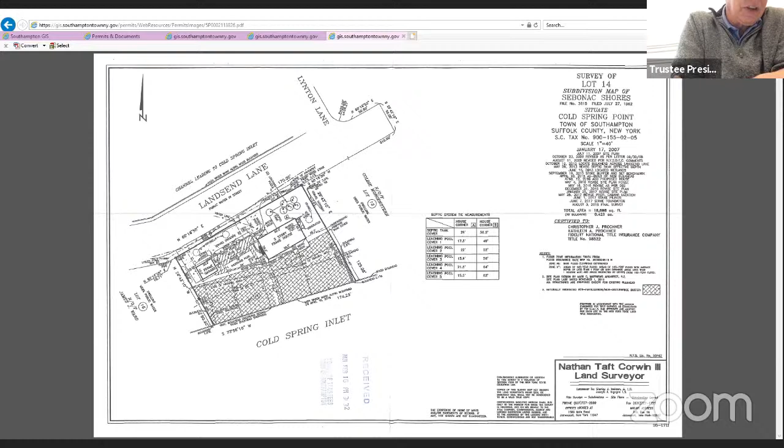Probably Landsend Lane has a paved portion and an unimproved portion, and everybody kind of just says, 'Oh, that's my side.' Yeah, it doesn't have to be spelled out anywhere. And eventually, through the years, they included it in the title description as an easement parcel. Like I said, I would have to pull it up. It was part of the subdivision. And so it's really old.

If it's an easement, how can he put a bulkhead on it? It's been there since before. I'm just saying, if he doesn't actually own the property, how can he? No, it would be a- he does own it because it's part of the deed, with an easement through it.

Okay, so like for the road. Right, so you have an easement for the road and then the parcel across the street. I thought you meant where the dock was. No, he actually does own it. It's part of the deed. It's just, like I said, an easement description.

So like if you have a right of way going across someone else's yard, you own that right of way as an easement. It is technically separate from your property. It could be across the street, to the water, to the whatever, but you own it, and it's part of your deed, but only as a described parcel. But these two lots are technically not joined.

Right, so there is one vacant lot that they own, and this is typical on this road. This happens down on the end too. There's a dock across the street on the vacant parcel itself, but the house is on Peconic Bay. But they own it, you know, it's weird. I can't even- like I said, it was back from the original subdivision, and now it's part of the deed for a described parcel.

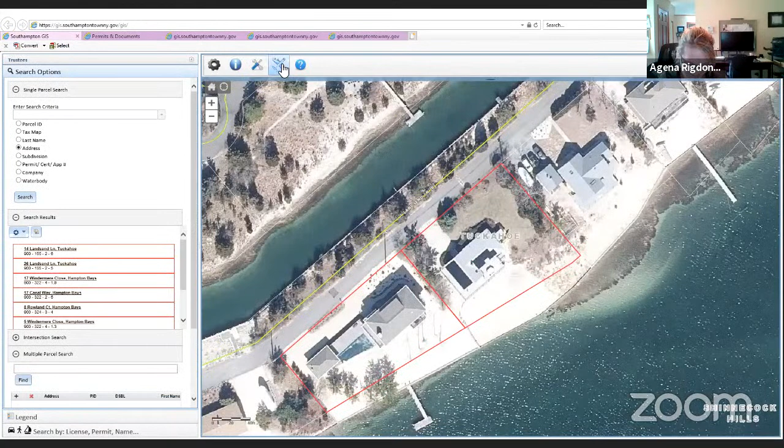Eventually I will probably come back for a dock for the man-made canal side, but he doesn't have a dock on Cold Spring Pond, and he's not interested in one. So we won't have this situation.

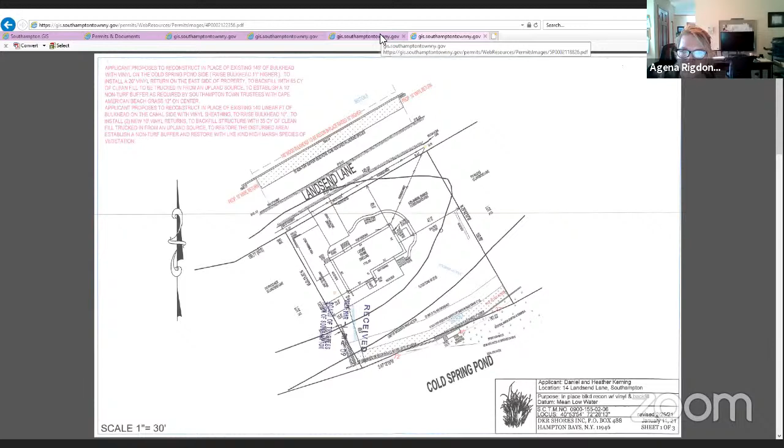So it is the same thing - there's another parcel across the street that has a bulkhead that needs to be replaced. This bulkhead's actually in worse shape. So the bulkhead on the Cold Spring side, we're just going to do them all at once. We're going to match Prochner's, and that was 10 inches higher on the Cold Spring side.

And it's really important on this side. Now that's the other side, that's the Dug Canal side. As you can see, those timbers are in not great shape. There's some sinkholes, they're like ankle breakers - I call them ankle breakers. I've actually fallen into them on occasion.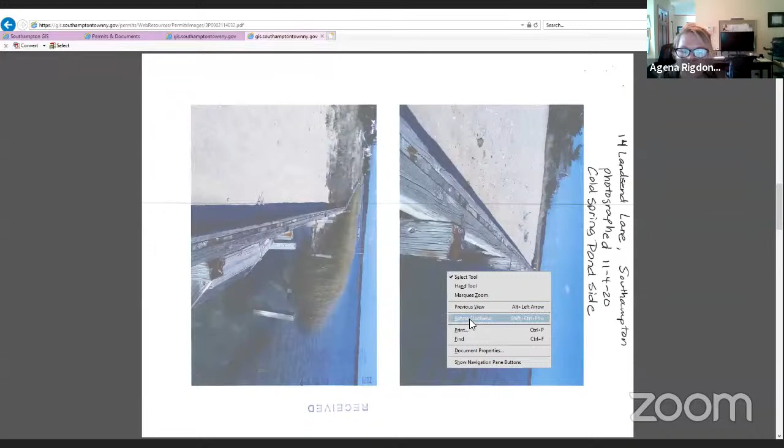So on the Cold Spring side, I would like to go up to match Proctor's bulkhead. That's a brand new vinyl that I did a couple of years ago, and I measured it. I would be fine with that, as long as he plants some grass, because where that is, you get - as Ed knows, he's been in there a lot too - it washes over all the time. Yeah, big time, it's almost the rack line is just about up to the house. The high water mark literally goes up to the house. So he needs to raise it there.

And plant a grass buffer, a lot of grass. So look at the picture on the bottom - that's Chris's that we did a couple of years ago, and see all of his beach grass and how he has no erosion. So we need to raise it and put the beach grass, and that should do the trick.

Gina, is that a capping on the bulkhead? How wide is it on the neighboring - that's the neighbor's property - bulkhead, and that's an 18-inch cap. That's untreated. Okay.

Sometimes those caps serve like little mini safety boardwalks, so it is what it is. It's elegant. I think the trustee regulations allow a 24-inch cap, I believe. Yeah, they do, and that one's only 18. So, but it's elegant, it does the trick. It's less than 4 feet - that's the neighbor's. Actually, it's pretty safe.

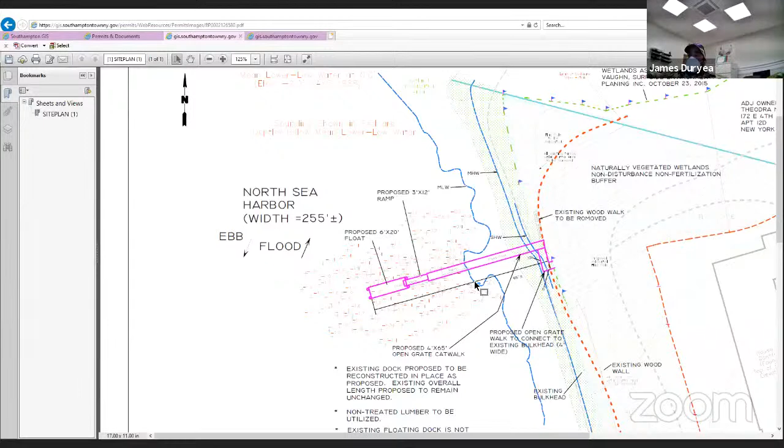Fine, Ed, December 1st to April 1st. So is that good? That's good for you, Bill? That's good for me, yes. As long as he's happy with that, you ask John about it. Yeah, I'll ask John, but I think that'll be fine. Yeah, because I know he uses it for duck hunting and stuff like that. Sure, okay.

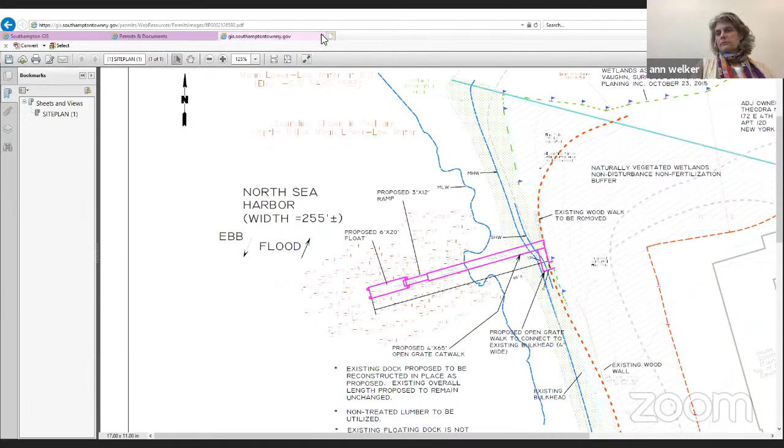All right, cool. So that's that, then, yeah? Yeah, thanks Chuck. Okay, thank you all. You have a great evening.

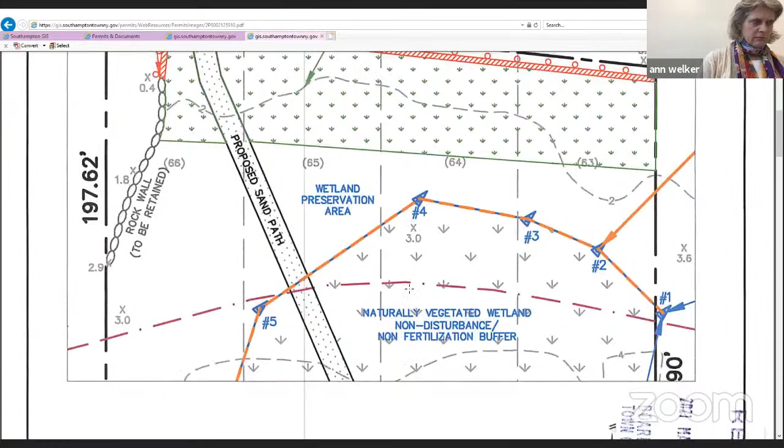Okay, Charles, is Mr. Lester here representing Brian Lester, representing 65 Cliff LLC, 65 Cliff Drive in Sag Harbor? Is Mr. Lester here, Charles? Okay.

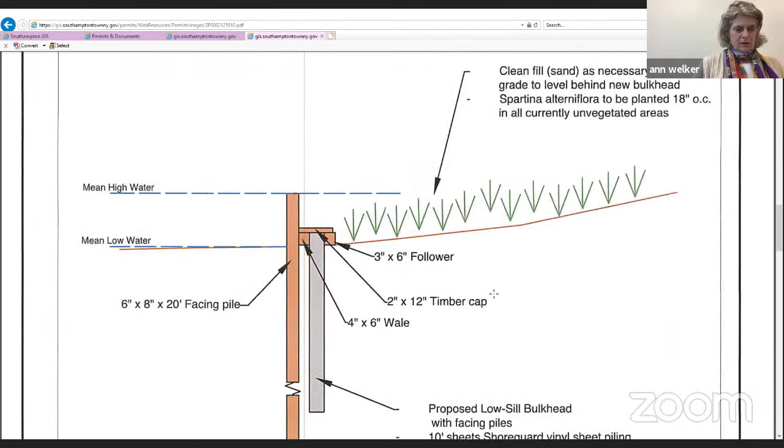This is a low sill bulkhead proposed in the location in which a previous bulkhead was removed. The one thing that we would like to specify is that this bulkhead would be approximately 100 feet in length across, and that there would be a buffer installed landward of the bulkhead.

Some of that information was noted on the plans but not on the cover sheet, and we would just have to correct that. Now, a significant amount of controversy has surrounded this particular permit and situation, so I would suggest that I sponsor a walk-on resolution for the official meeting that follows, to schedule a public hearing on this issue, since there's a lot of public controversy.

Okay, I agree with you, President Schultz, because there's a lot of questions we want to ask the applicant about—the timeframe he's going to do it, the dredging and stuff like that, and the fill that comes, that is the clean sand, that's going to be leveled behind the bulkhead. We want to talk about where that's going to come from.

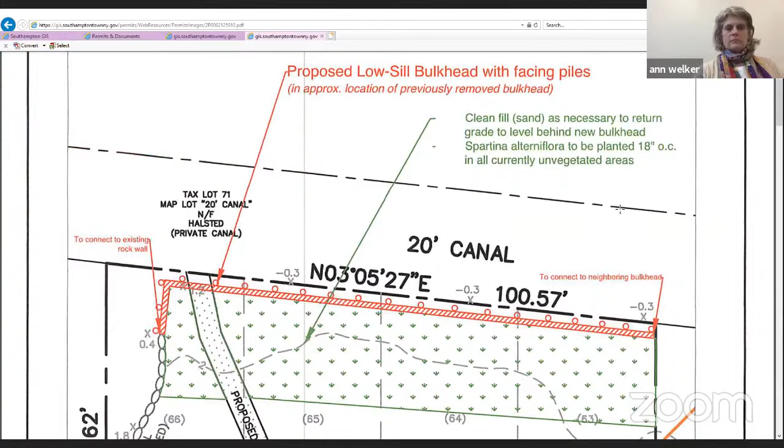Can we set a public hearing? Yes, official meeting coming up next, and if we do it today it can get in for the next regularly scheduled meeting. If we do it on Mondays, on the next Monday meeting we have, it's going to push it forward a lot. So if we do it now, we can get it in the pipeline and have the okay on the 5th. Okay, where's the cover sheet for this?

I emailed—oh, hey Brian. Hi, sorry, but I emailed a revised one over this afternoon. It's probably too close to the meeting start, but you should have that.

Hey Jane, when you get that new cover sheet, can you email it out to each trustee please, so we can review all the information on this before the public hearing? Absolutely. Thank you. Okay, is there any other questions?

I got the timeframe and the dredging and the fill clean sand. Is there any other questions you want me prepared to answer during that hearing, that I can try to scope out between now and then? That's what I can see—it pretty much is evidence of what you've submitted, what we basically asked for.

This bulkhead that was removed was prior permitted by the trustees, is that correct? Yes, that's what I understand. We'll pull up the original bulkhead plans. I'll have James put that on, and we'll have that ready for the public hearing, showing when it was issued, and some aerial photos showing historical pictures of the canal, areas that we have. Okay, so we'll have—is there more to this?

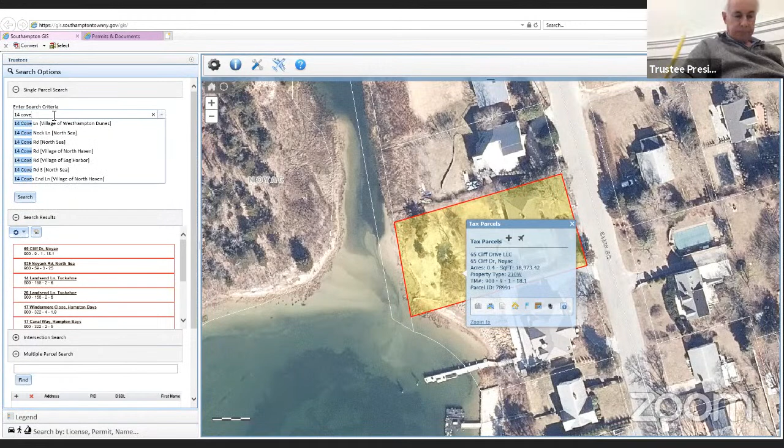Next item, 14 Cove Lane. So 14 Cove Road, this is an application to construct a 4 by 27 foot catwalk, 3 by 12 foot ramp.

This would be InterScience. It says First Coastal on it - I'm sorry, First Coastal, Billy Mack. Billy, if you want to talk about it, that'd be great. But it's basically a ramp, a catwalk, and a float with no treated wood and open grate.

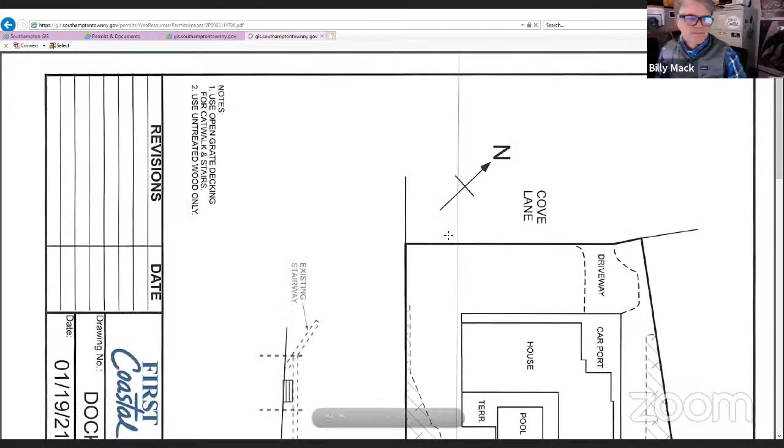Hi everybody, how's everybody doing? So this is an old house in Upper Sag Harbor Cove, and we're looking to extend off this deck and staircase a walkway, catwalk, dock with a float and ramp. It looks like we meet the criteria and we're still inside the pier line. Everything would be non-treated, through-flow decking, and seasonal ramp and float.

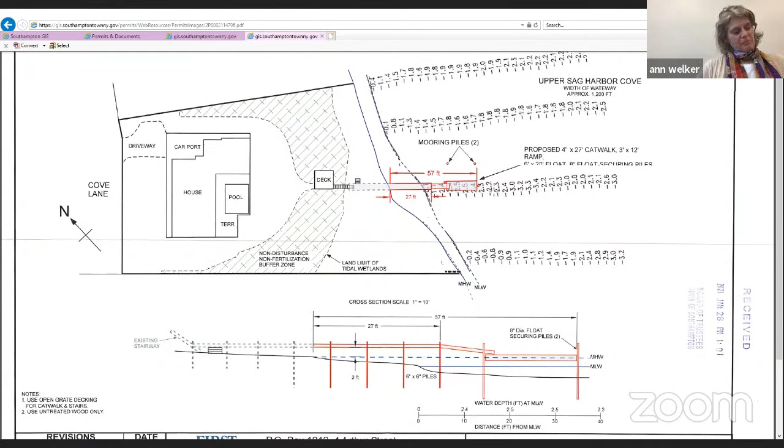It looked okay to me. Billy, you're kind of lucky because there's a deep channel that comes in close to shore, so that dock doesn't have to be super long. It's a really steep bluff right above it, heavily vegetated, with some good marsh down at the water line.

Yeah, it's well vegetated. I think the owner's going to reconstruct the house at one point, and he's going to be undertaking some revegetation with additional native planting as part of that application. Does anyone have any questions about this? The one thing that's come up in prior applications within Sag Harbor Cove is the pier line, and this property is an exception to that, so happily.

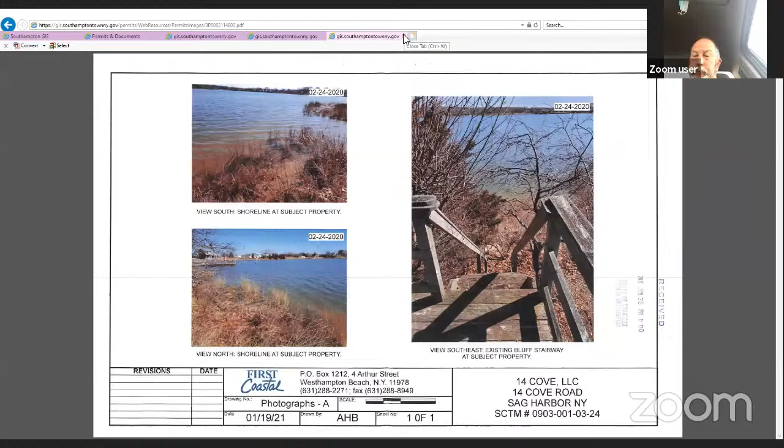So if there are no questions, I'd like to move this forward. I'm good with it. Everybody else okay? Yep, fine. Okay, good. James, if we could please move this forward then. Thank you, Billy. Thanks, everybody else.

That's the last application. Before we close, I'd like to add this: I've been advised by counsel that the correct procedure on this Cliff Drive situation is that instead of hold, we move it to advance to public hearing, because then it would be applicable to discuss it at the public hearing. Okay, we'll advance it then.

Wait, there's just one thing - Susanna Herman was here, is she still here? She put a note in the chat saying she's here for Aquadina. Hers was advanced. She's still on. It was advanced, you guys reviewed it, it met the Blue Book, and it was advanced. So there you go, Susanna.